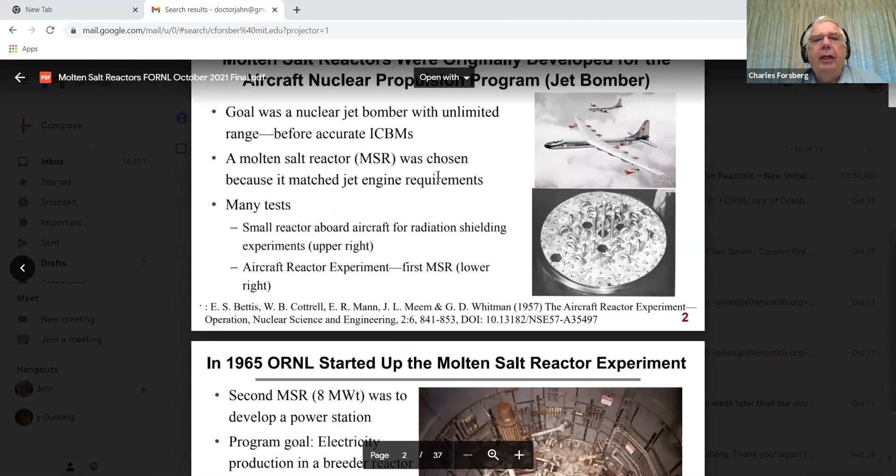Okay, we can go to the next slide for some history of the molten salt reactor. These reactors were originally developed for the aircraft nuclear propulsion program, that is, the jet bomber. The goal was a nuclear jet bomber with unlimited range. That was before the development of accurate intercontinental ballistic missiles and before people had satellites to find out where cities were located in the Soviet Union. It's a little hard to bomb a target if you can be off by 50 miles and if you don't know where it is.

An important point to observe, which I'll come back to later, is that the molten salt reactor was chosen because it matched jet engine requirements - we'll get back to why that's important in terms of modern power cycles. There were a lot of tests, including some big ones. A small reactor was put aboard an aircraft for radiation shielding studies. And in Oak Ridge, the aircraft reactor experiment was the first molten salt reactor that was actually built - there's a picture of the top plate on the right.

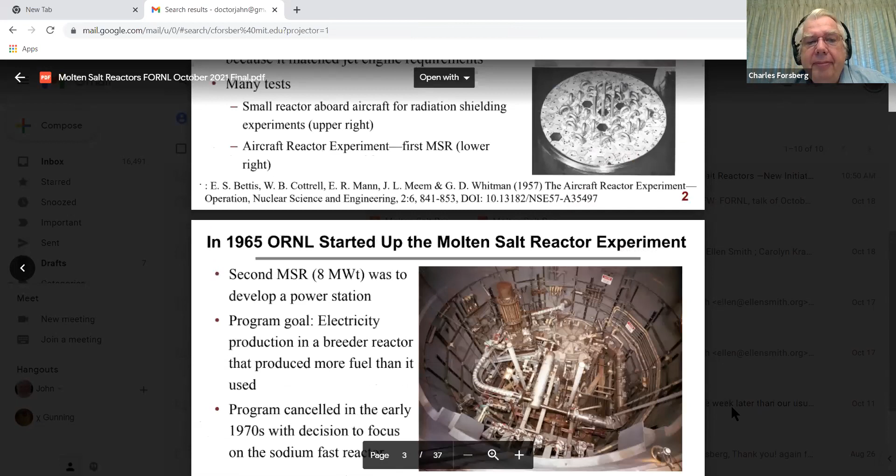Now, some of you probably are much more knowledgeable on this than I am.

In 1965, ORNL started up the molten salt reactor experiment. It was the second molten salt reactor, 8 megawatts. The goal was ultimately to develop a power station. Programmatically, it was electricity production in a breeder reactor that produced more fuel than it used. The program was canceled in the early 70s with a decision to focus on sodium fast reactors.

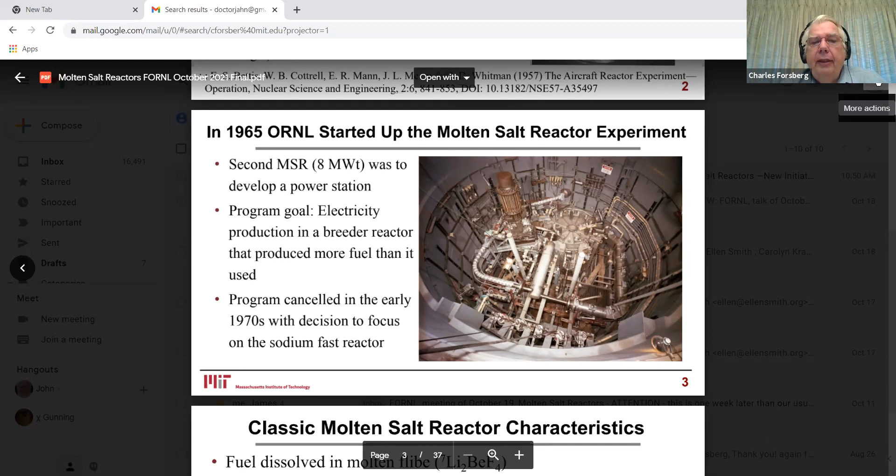A brief description of what I'd call the classic molten salt reactor. The fuel is dissolved in a molten fluoride salt, versus all other reactors that are solid fuel. The breeder reactor converts fertile thorium into uranium-233 and fissions that uranium. That involved online processing of the molten salt. You obviously would have an energy source for millions of years.

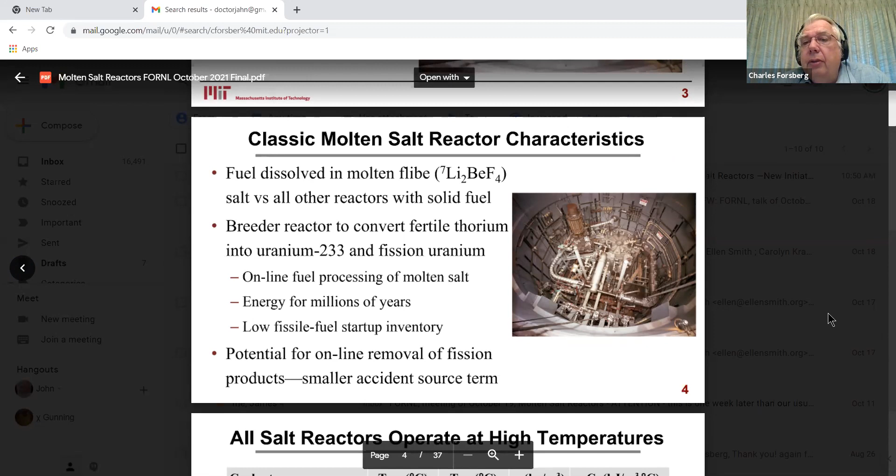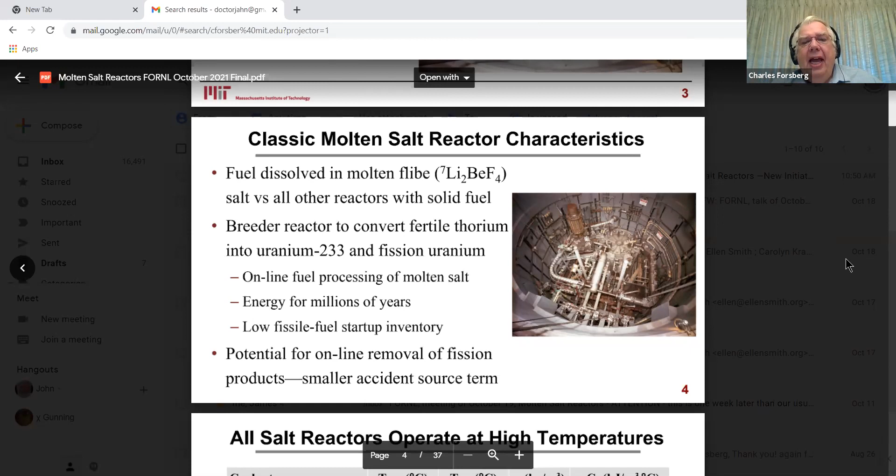One thing that's not appreciated now, but was very much appreciated at the time, is that these thermal spectrum molten salt reactors have very low fissile-fuel startup inventories compared to other reactors. At that time, one of the real concerns was how much fissile material was on the planet Earth. It turns out the geologists were off by a factor of 100, maybe 1,000 - they were seriously in error.

Whoops, we just lost the picture. Sorry, I was trying to get Jim Rome to mute, but I screwed up when I did that. Hey Jim, mute yourself, Jim.

Last, which is often not appreciated, is that in a molten salt reactor you have the option of removing the fission products, which limits the accident source terms. That keeps coming back in terms of safety. I'm not going to go into it, but it's an important future option.

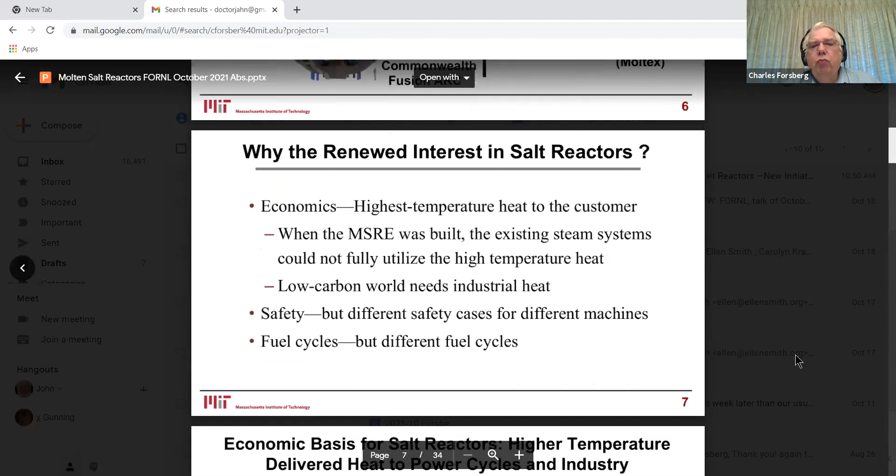Why the renewed interest in salt reactors? The first one is economics - high temperature heat to the customer. One of the interesting things about the molten salt reactor experiment is that when it was built, it did not couple well to existing steam plants, because it ran at such a high temperature compared to the steam plants of the day. That's no longer a challenge - steam plant temperatures have gone up. Second, in a low carbon world, you need industrial heat, and this high temperature characteristic is what the customer buys the reactor for.

Second, there are safety advantages, but that depends on the particular machine and their fuel cycles - and we now have a lot of different fuel cycles.

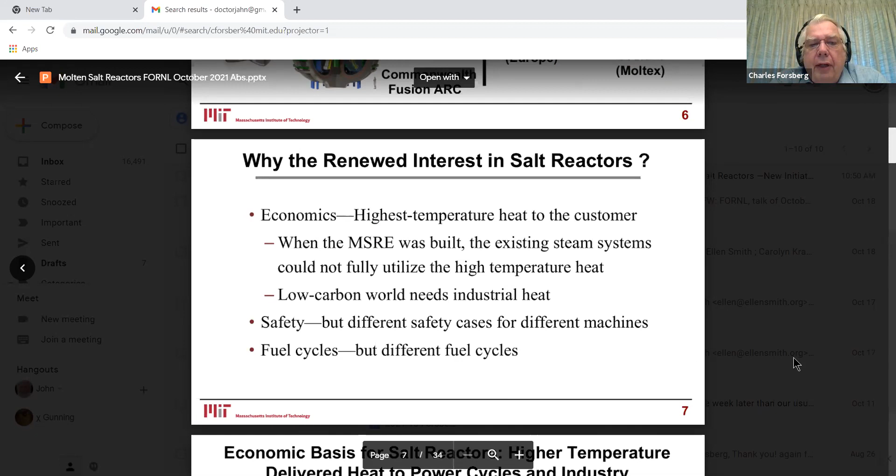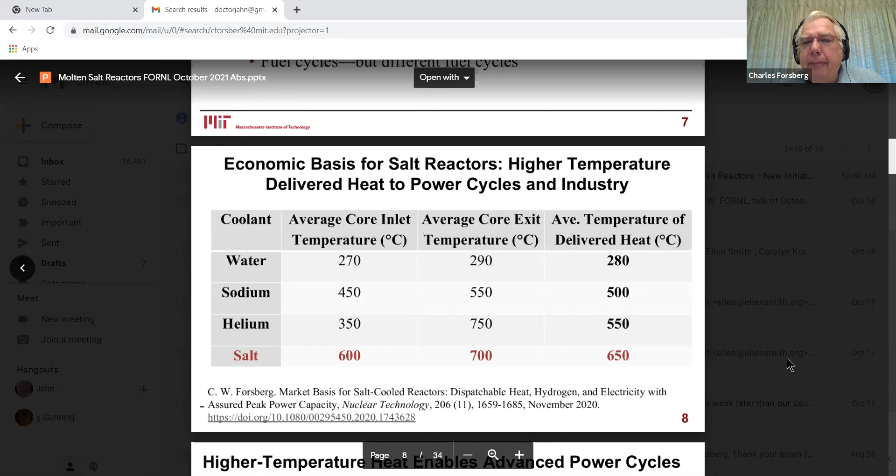Now, high temperature heat enables advanced power cycles. This slide could be an hour talk by itself, so I'm not going to say very much about this, except starting with the observation that molten salt reactors are designed to couple to a jet engine. And the most popular power plant today is the combined cycle gas turbine, a consequence of 70 years of advances in gas turbine technology. And because salt reactors were designed for these things, they actually couple pretty well with them. There's a lot of work on something called a nuclear air Brayton cycle with heat storage.

You operate the reactor at base load, but it is variable output to the grid. And what I mean by variable output is you have the reactor providing heat, in the light blue, to the multiple turbines. But after turbine 2, you can operate in base load, or you can take the temperature from let's say 650, 700 C, and inject natural gas or hydrogen to boost the temperature for the last turbine in the gas turbine cycle up to about 1400 Celsius if you want, blazingly warm.

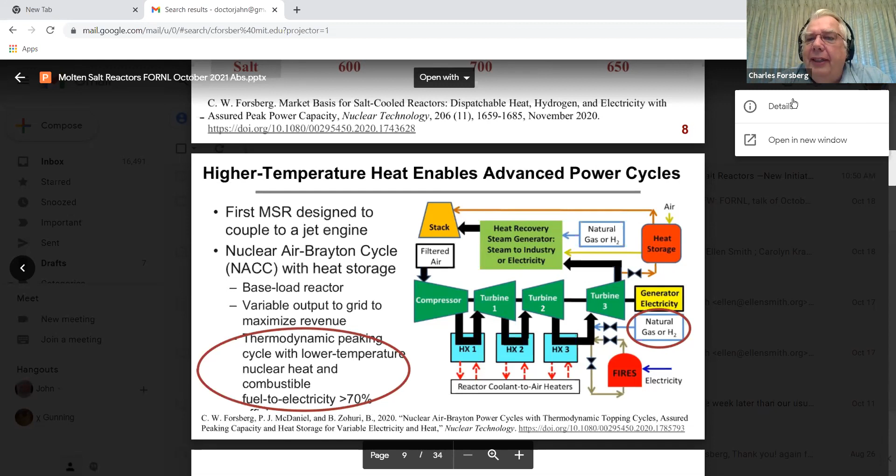And when you do that, that booster stage, that peak power capability results in a system where the incremental gas or hydrogen heat to electricity efficiency is over 70%. It's a thermodynamic topping cycle. So there are lots of things you can do if you can couple your reactor efficiently to a gas turbine, which fortunately was the design criteria for molten salt reactors. And there's an open source article if you want to go into the gory details of what that involves.

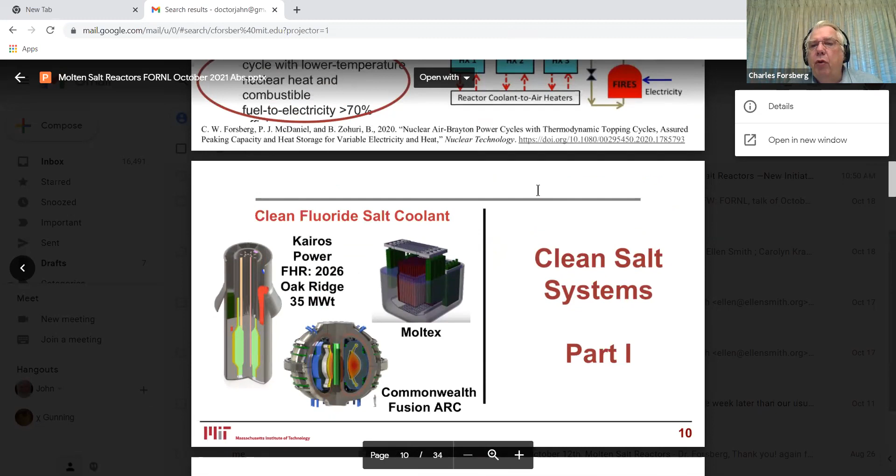Could we have the next slide? Now, the next set of few graphs are going to cover clean salt systems. So these are clean salts. There's no fissile material in the salt. I'm going to discuss two: what Kairos is up to, and Commonwealth Fusion's ARC system. Next slide.

Fluoride-salt-cooled, high-temperature reactor, clean salt, solid fuel. This is being developed by Kairos Power. It's a 35 megawatt test reactor, the first one they plan to build, which should be operational by 2026 in Oak Ridge. Kairos has about 200 full-time people plus an awful lot of part-time people and consultants and contractors, so it's a substantial effort to get that reactor built on time.

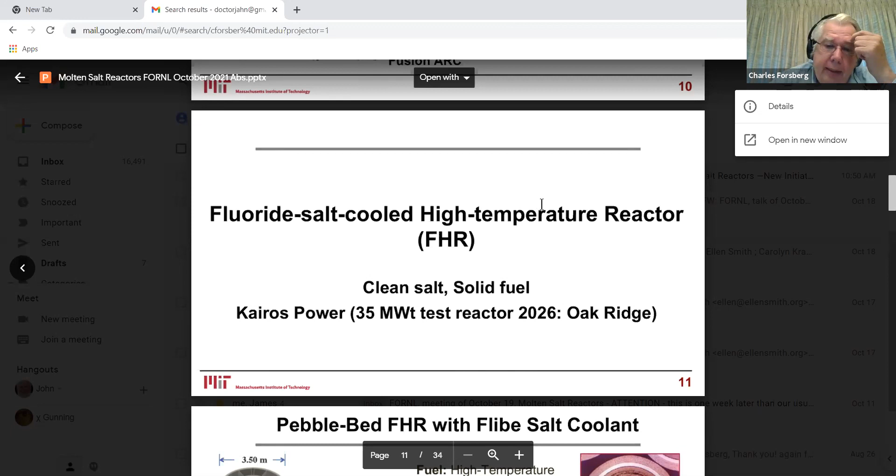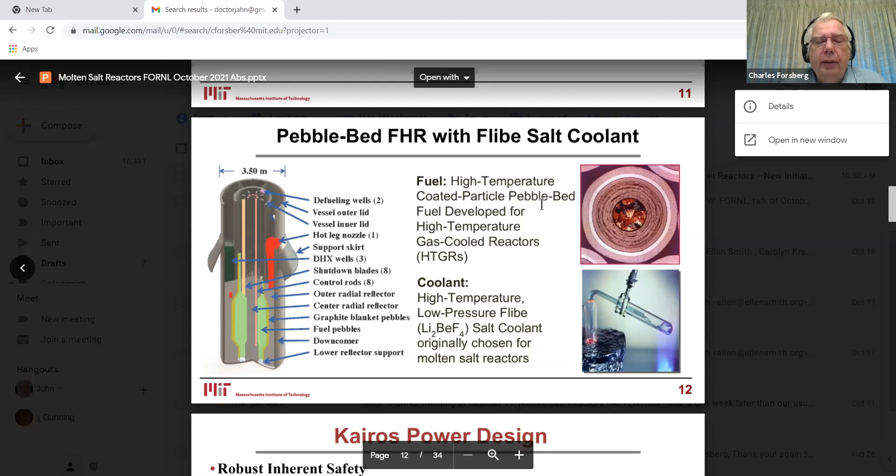Next slide. The FHR is a pebble bed FHR with fluoride salt cooling. You have the high temperature fuel and the liquid salt coolant. Can I have the next slide?

Okay, there's a newer version of this slide deck that I sent you, but I'll just mention what's in the newer version in passing. The fluoride salt cooled reactor came out of Oak Ridge National Laboratory, and that shouldn't be too terribly surprising because it combines liquid salt with HTGR fuel, and Oak Ridge had major programs in both areas. So there were lots of people that became very familiar with that particular reactor concept.

Now, it turns out in about 2002, there was a Gen 4 meeting, and myself and Per Peterson of Berkeley and Paul Pickard of Sandia were on the miscellaneous reactors subcommittee. And we went out to lunch and were not very impressed by the odds and ends that people had proposed. Out of that lunch came the FHR, which combined high temperature reactor fuel with molten salt. And that had a lot of advantages.

The HTGR fuel goes to very high temperatures. When you go from a gaseous coolant to a liquid coolant, your cooling capability goes up dramatically. It's a tremendous difference. And so you can get the power density up by a factor of 10. You also have a whole bunch of safety advantages.

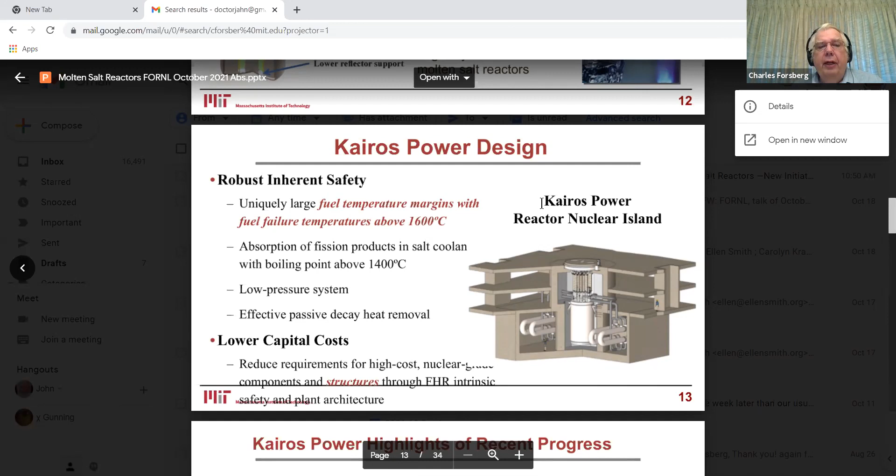They have a second facility coming online in Albuquerque, the engineering test unit and training facility. This is where the big equipment goes. As I'll describe later, on the Hermes reactor, they will build a non-radioactive version of the Hermes reactor in Albuquerque and run it, shake it down, and that will be used for the design of the Hermes reactor. They have an engineering test unit which will be the same size as Hermes, and they've filed a preliminary safety report in September. And of course, the Hermes reactor will get built in Oak Ridge and is supposed to be operational by 2026.

Could I have the next slide? The Kairos power design — this shows the engineering test unit, and the sequence of activities. They're doing a lot of laboratory tests in Alameda. Then they move to Albuquerque, where they have the engineering test unit, which is full scale, the same scale as the Hermes test reactor, where they have the flibe salt at temperature and shake out everything from control rods to pumps to instrumentation.

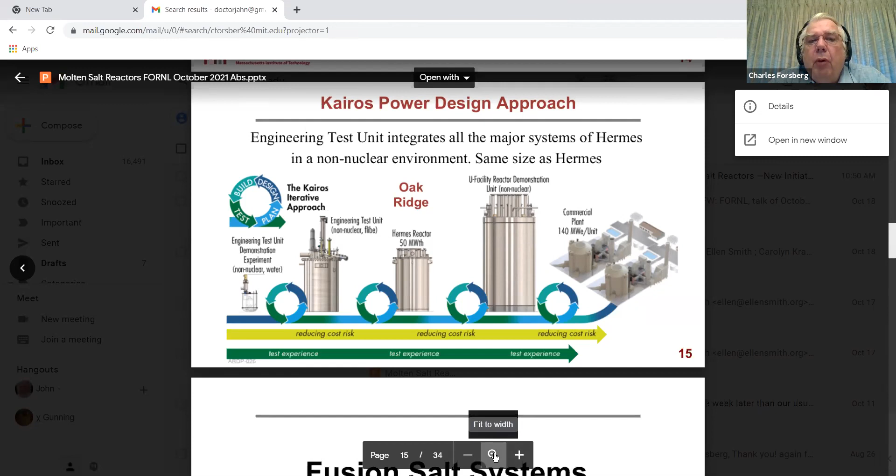Then they move to Oak Ridge, where Hermes will be built. It'll be about 35 megawatts, and that's about a 20-foot high vessel, to give you some perspective. After that, they'll go back and build the full-scale non-radioactive variant of the FHR in Albuquerque, and that leads to the commercial plant with a power output of 140 megawatts per unit. One thing you'll note about this, as a salt-cooled reactor with solid fuel, is the vessels are actually pretty small.

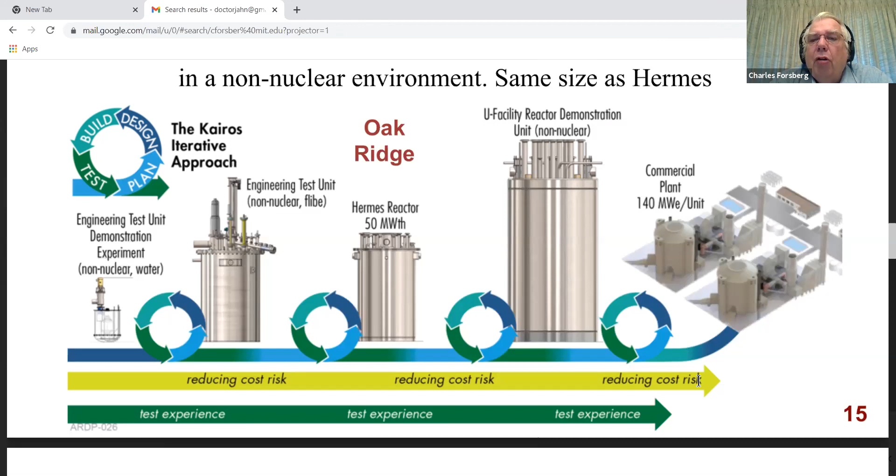That's partially because liquid salts are a great heat transfer fluid. And if you have an HTGR fuel, you can run a lot of delta temperature drop across the fuel to heat the salt. So a lot of things come together for a fairly small reactor. Could I have the next slide?

Well, I'm now going to shift gears to the fusion salt systems. And if I could have the next slide, describe what's going on. There's been a breakthrough in magnetic fusion with REBCO superconducting magnets.

Turns out that the size of a fusion system varies with one over the fourth power of the magnetic field, not fuels. And there was a manufacturing breakthrough of REBCO supermagnets about a decade ago that enabled doubling the magnetic field. People had wonderful superconductors — there was only one small problem: they could fabricate them at the milligram scale, and that doesn't work very well if the quantities of superconductor you need are measured in tons. But about a decade ago, somebody in the manufacturing space finally figured out how to do that.

Why is that important? It reduces the fusion machine size by a factor of 16. And what that implies is that the power density in the fusion blanket increases by an order of magnitude, making it very difficult to cool solid blankets — a big problem there. The other thing is these very high magnetic fields create very large incentives to have a low electrical conductivity, to avoid coolant-magnet interactions, and the solution is a liquid flibe blanket. Now, these blankets have been looked at before, but they haven't been high on the priority list. But with these much higher powered fusion machines, suddenly salt blankets look like they become the preferred option.

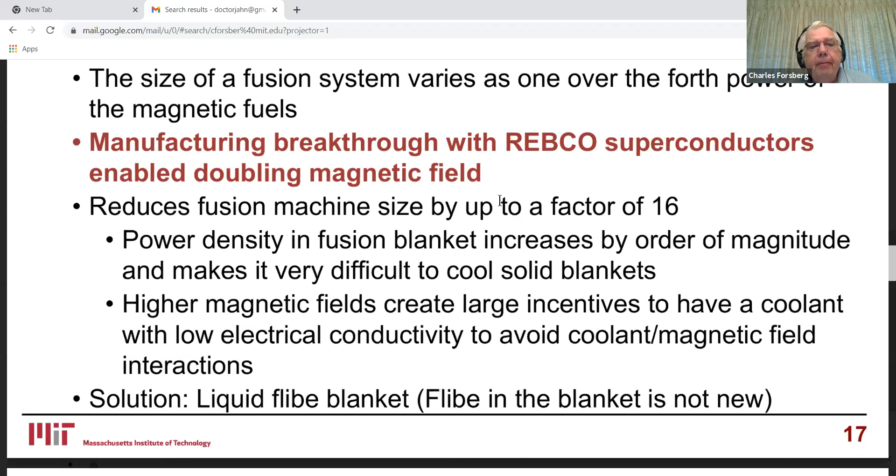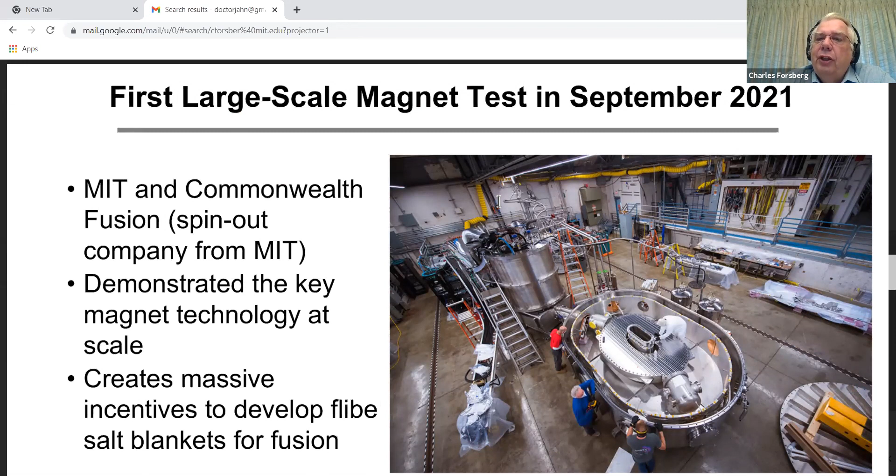MIT did the initial analysis and initial studies of this kind of system. MIT and Commonwealth Fusion, a spin-out company from MIT, built the first large-scale magnet test. Because to make this machine work, the whole question is, can you build a 20 Tesla, really big, high-powered magnet? That was tested last month. So I think you can safely say all future fusion machines are going to use that magnet technology. And with it comes very high power densities in the blanket, and big incentives to develop flibe salt blankets for fusion. So the fusion game is driving in the same direction of developing flibe salt.

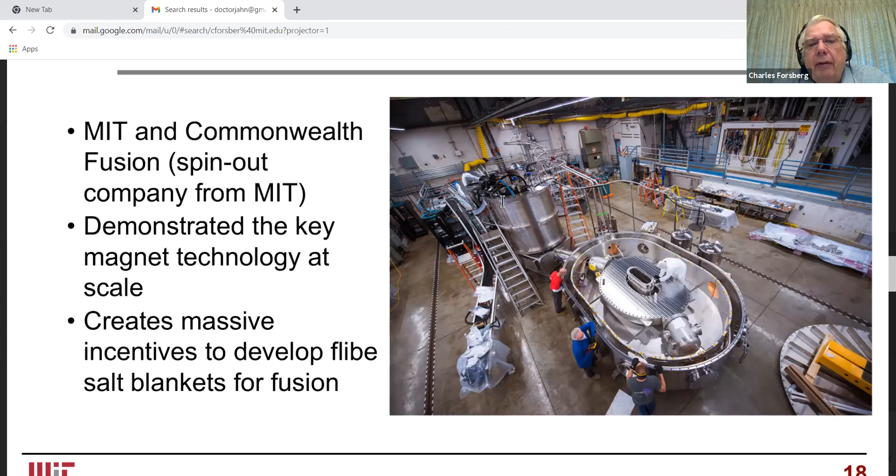That's the fuel. Now, one important observation: in a fusion machine, you use lithium-6 to maximize tritium production, which means the tritium production rate in this machine is about 1,000 times higher than it is in the Kairos FHR. So these guys have a serious tritium challenge in containing the tritium. That was an issue for the molten salt reactor, but for these guys, when it's 1,000 times larger, there's going to be a lot of work on tritium control systems.

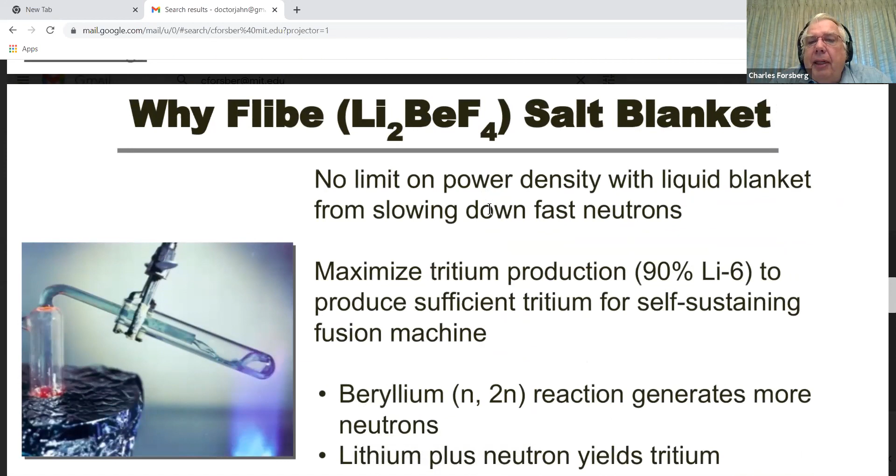Why flibe salt? No power limit on the power density. Second, you can maximize tritium production with lithium-6. A whole bunch of nuclear reactions generate tritium. There's a beryllium (n, 2n) reaction that works quite nicely with these high energy neutrons, and there's lithium plus a neutron that yields tritium. Last, which most people don't appreciate, is that of all the salts, FLiBe actually has the best heat transfer properties. There are a lot of other fluoride salts, but it turns out that if you do the heat transfer experiments, FLiBe is the salt you want to use if you've got a serious heat transfer problem.

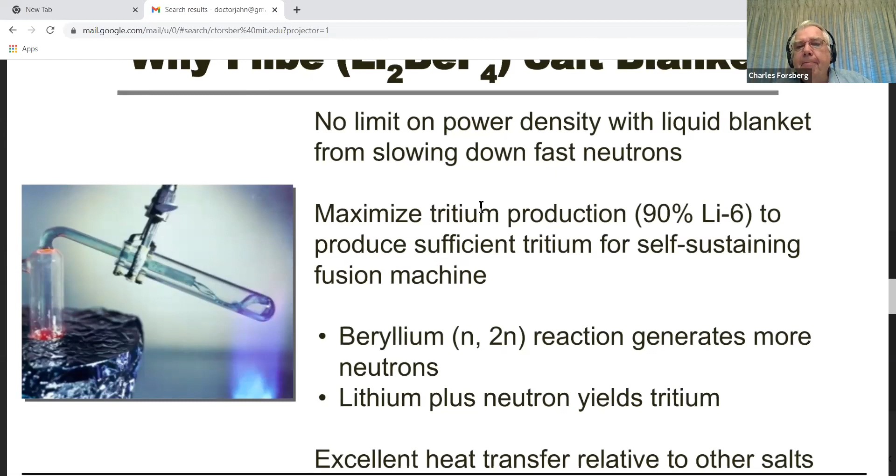With that, let's turn to the next subject. Now I'm going to discuss uranium plutonium fuel dissolved in salts, and I'm going to use two examples.

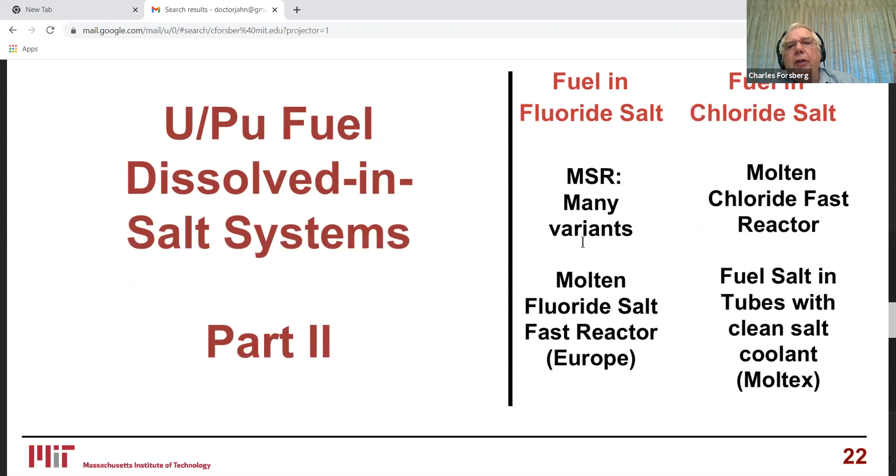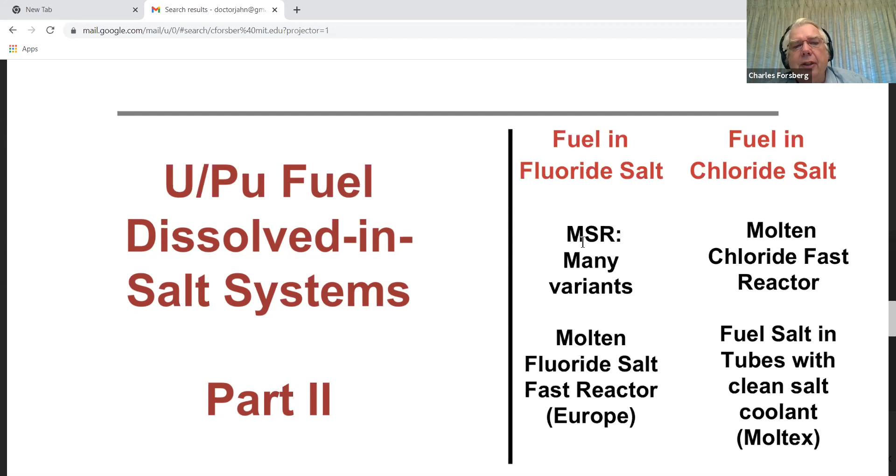I should mention, by the way, in terms of funding, my guess is that the previous two fission and fusion examples probably have the most funding. Nobody's publishing how much money they're spending, but if you look at the number of people and the size of the laboratories currently, I think the FHR and the arc fusion system have the highest burn rate in terms of money, because I know the Alameda site has 200 people full time on it, plus Albuquerque and a few others, so they're burning money at a good clip. These other two examples are also burning money, not quite at the same rate, I don't think, though. But the next one, on the next slide, they're working hard to catch up, and they will catch up.

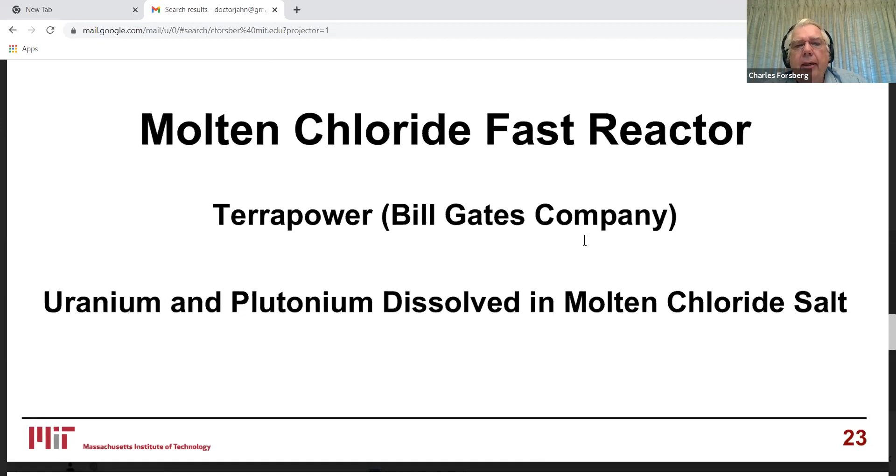That is the molten chloride fast reactor, being developed by TerraPower, a Bill Gates company. It's uranium, plutonium dissolved in molten chloride salts. Chloride salts have been around a long time, but as I will discuss, this particular concept is less than a decade old. Two classes of molten chloride fast reactors are being developed.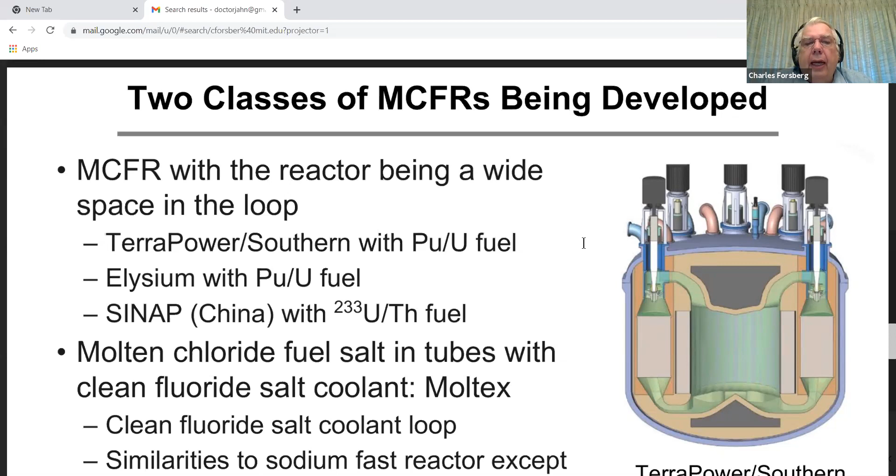The first one is the molten chloride fast reactor, with the reactor being a wide space in the loop. The big player is TerraPower with Southern, a utility, using a plutonium uranium fuel cycle. The other company is Elysium, also with a plutonium uranium fuel cycle. The Chinese at Sinap are also looking at this, with a uranium-233 thorium fuel cycle.

The second version is a molten chloride fuel salt in tubes with clean fluoride salt coolant, being developed by Moltex in Great Britain. They have a clean fluoride salt loop, which makes it easier on the primary loop. It's sort of similar to a sodium fast reactor, except it's really simple to process the fuel because you have liquid chloride salt in the tubes. As you cut off the tubes, you just pour the chloride salt out. So it's really fast, simple reprocessing if you choose to go that route.

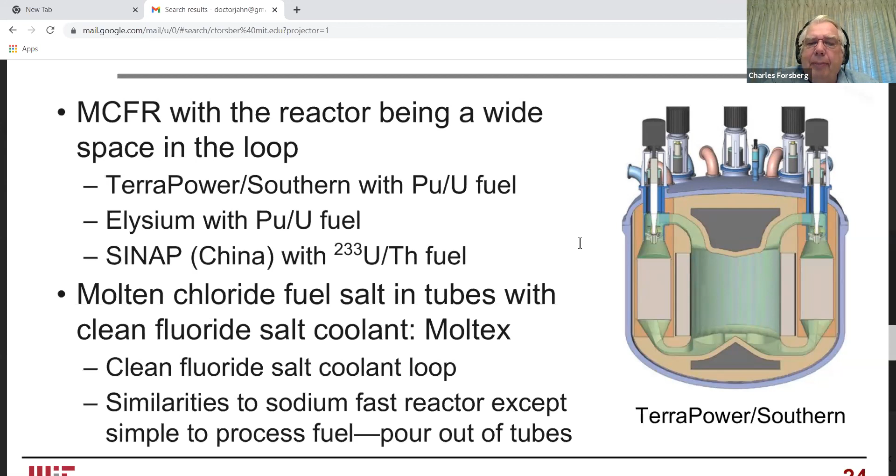Now, TerraPower is a little bit different as a nuclear company. They defined goals, and that led them to choose the reactors they wanted. They wanted the usual things: engineered safety, minimize energy cost, offer new options for nuclear waste, maximize proliferation resistance, which is a very big issue in their priority set, and provide global scale energy.

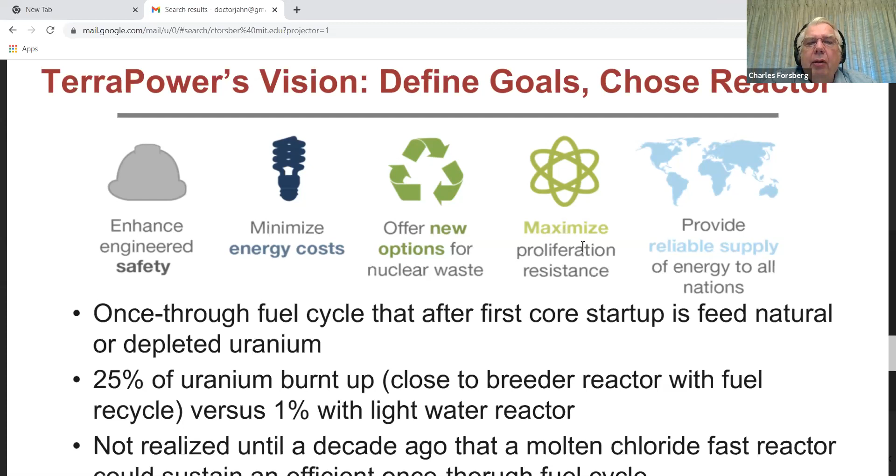What the molten chloride fast reactor they've developed uses is a once-through fuel cycle. After the first startup, it burns either natural or depleted uranium. So you start it up, and after that you put in a little depleted uranium and take some of the fuel out. This particular kind of machine can get 25% of the uranium burnt up. That's very close to what a traditional breeder reactor can do with fuel recycle, versus 1% with a light water reactor.

Now, it was not recognized until a decade ago that such a molten chloride fast reactor with a once-through fuel cycle was actually possible. It turns out there were some question marks on the chlorine cross sections. And of course, who has an interest in chlorine cross sections with a couple of MeV in the fission range? Nobody was looking at it, so nobody had an interest in it. In addition, it turns out to make this machine work, you have to use chlorine-37, the low cross section. Chlorine-35 is a sky-high cross section, which will shut down anything. So it's not too surprising measuring certain cross sections was low on everybody's priority list.

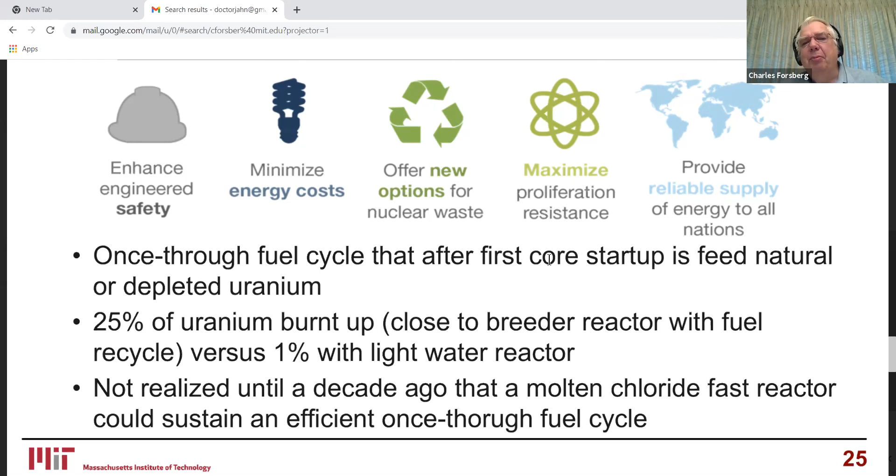Then somebody measured it and they said, whoops, a little bit off on the estimates. And then everybody was off to the races. So it's a new concept based on some new knowledge in the last decade.

Could I have the next slide?

TerraPower's once-through breed and burn. This machine has a really hard neutron spectrum, very high breeding ratio. It converts fertile uranium-238 to fissionable plutonium-239 and fissions the plutonium. Again, you start up the first reactor with enriched uranium chloride, uranium-sodium-potassium chloride mixture. Add natural uranium and throw away some of the fuel salt with fission products and actinides, into a deep borehole or equivalent disposal. As I said, the really interesting thing is you can burn 25% of the uranium fed into the machine, assuming you get the machine to work.

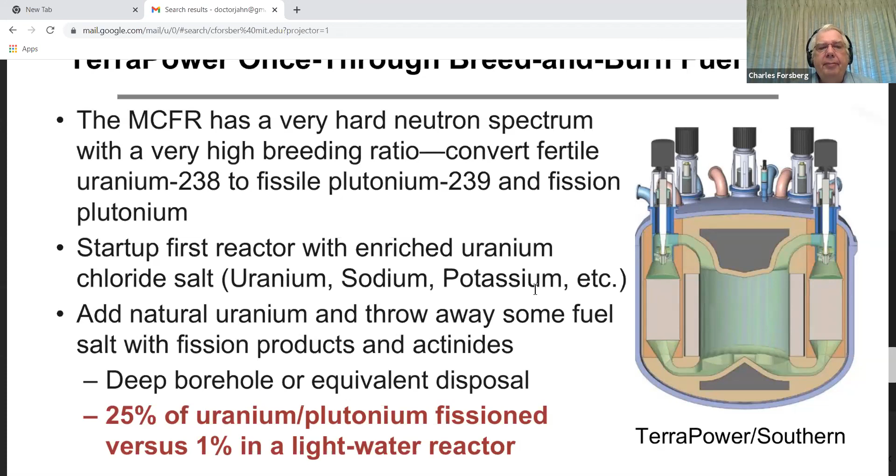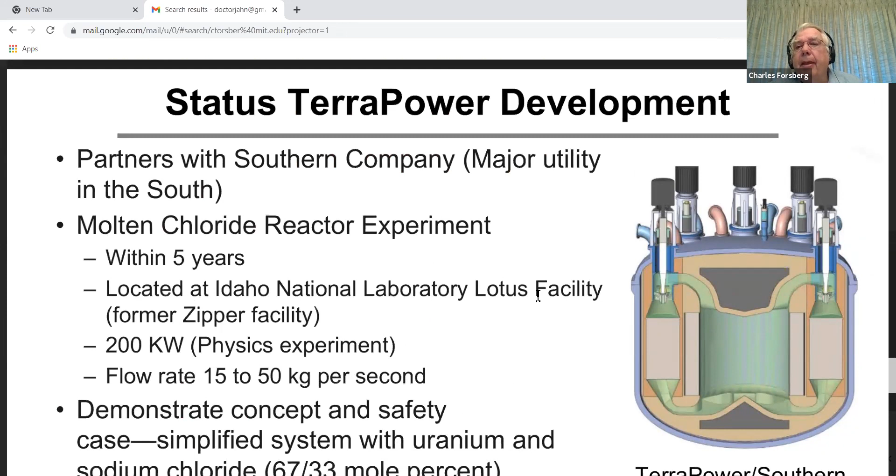Status: they're partners with Southern Company. What they plan to do is a molten chloride reactor experiment, to be built within 5 years, located at Idaho National Laboratory in their Lotus facility, formerly known as the Zipper facility. It's a 200 kilowatt physics experiment to make sure the reactor kinetics are understood in the system. The flow rates are 15 to 50 kilograms a second. And of course, it's primarily to demonstrate the concept and the safety case. It'll be a very simplified system.

They'll use high enriched uranium and sodium chloride, which will be able to answer the reactor physics experiments. The physics analysis all indicates the machine should be stable in terms of reactivity and kinetics and so forth. But this machine is so far away from everybody else's design space that the answer is, you better go out and try this out just to make sure we haven't messed up somewhere in the calculational space.

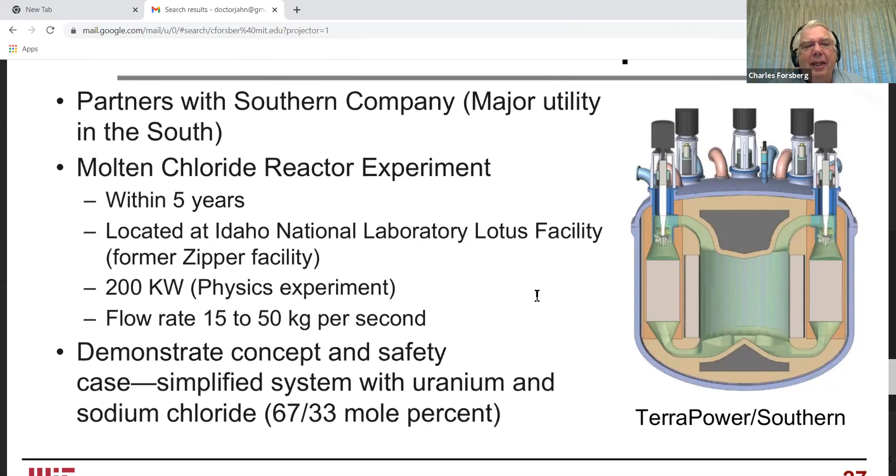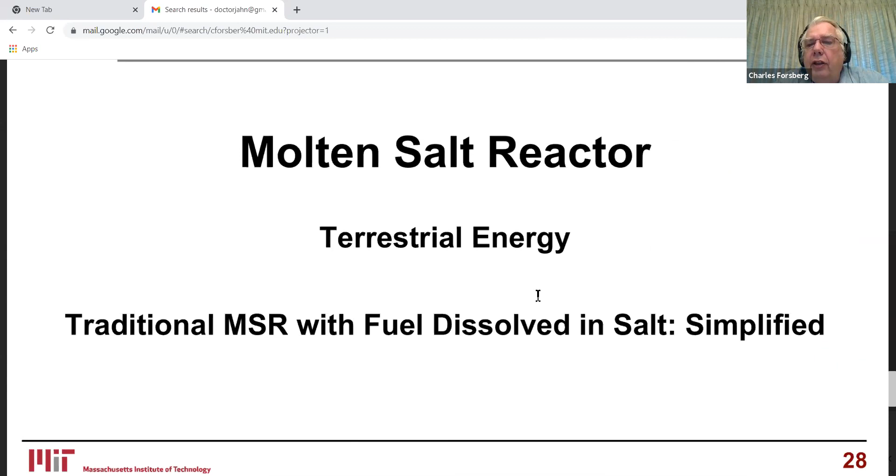The molten salt reactor. I'm going to discuss Terrestrial, this Canadian company, which has a US subsidiary. It's a traditional molten salt reactor with fuel dissolved in salt, a simplified version of that machine.

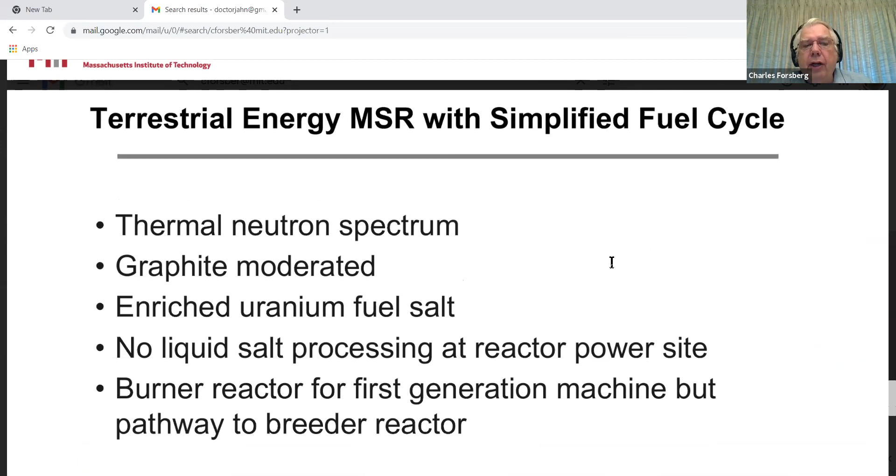Could I have the next slide? Terrestrial Energy: molten salt with simplified fuel cycle, thermal neutron spectrum, graphite moderated, enriched uranium fuel salt, no liquid processing at the reactor site. It'd be a burner reactor for the first generation, but a pathway to a breeder reactor.

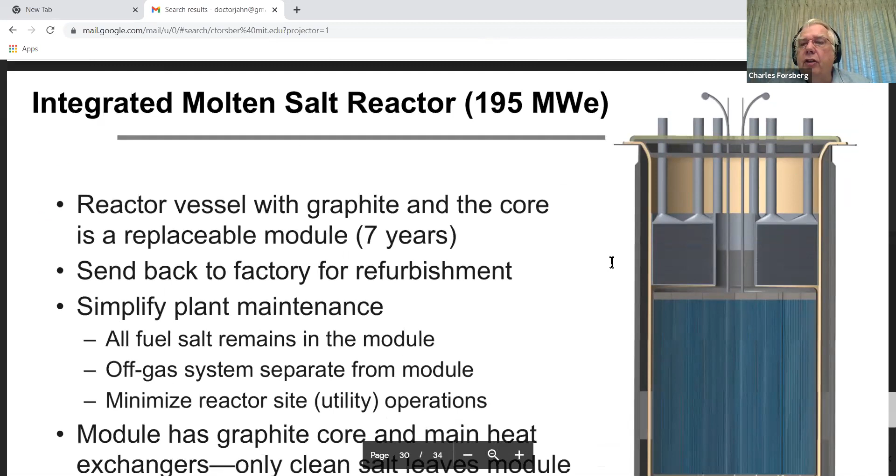You run it for 7 years, and they send you a replacement module. You let the module you took out sit for a while, then send it back to the factory for refurbishment. The goal is to simplify plant maintenance.

All of the fuel salt remains in the module, which contains the fuel salt, the graphite, and the intermediate heat exchangers. The off-gas system is separate from the module, and the goal is to absolutely minimize reactor site operations, letting all the complicated operations, such as replacing the graphite, be done at the factory.

The design feature is that with the graphite core and main heat exchangers, only clean salt leaves the module. So it's a package system where you send it back to the factory when you're done. You can move some of the salt from one modular unit to the next unit at the site, but the idea is to really minimize this from the utility perspective and let the fuel cycle guys deal with everything else.

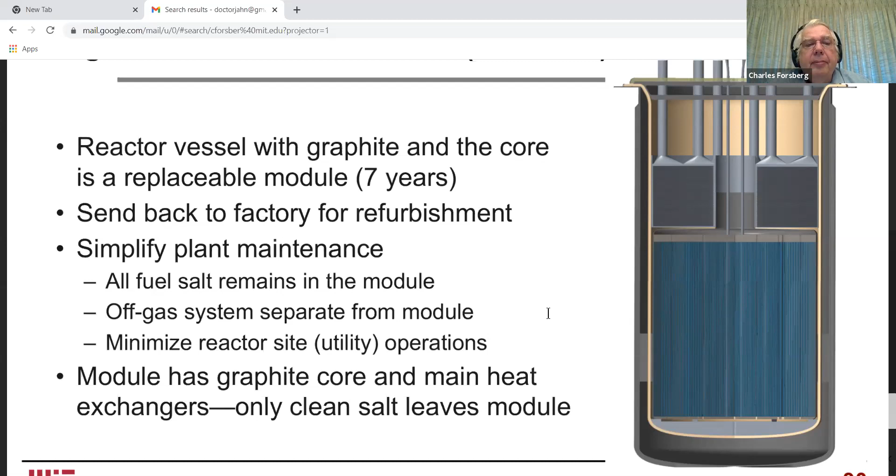Can I have the next slide? This happens to be the flow sheet of their system: three loops, a primary loop with fuel salt, a secondary salt loop, and then a nitrate salt loop, which is the tertiary loop.

The FHR also has a nitrate salt loop, and so does the different salts proposed for the TerraPower one. The thinking here is that with a nitrate salt, you can put in heat storage for variable output with baseload input of heat.

Most of you may not be aware of it, but all of the big concentrated solar plants use nitrate salt as their heat transfer loop, and they store gigawatt hours of salt in hot and cold tanks.

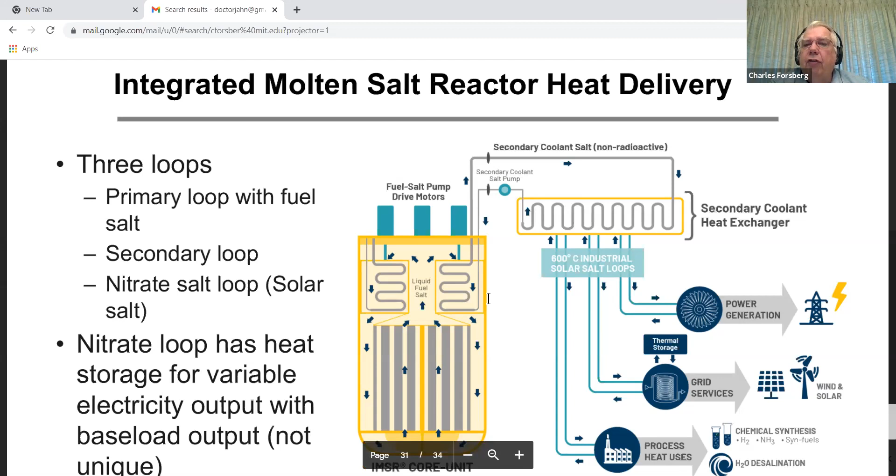If you have a nitrate salt system in the intermediate loop somewhere, you can put in gigawatt storage to handle daily to weekly cycles of heat for variable energy demand while the reactor operates at base load—essentially replacing the role of the gas turbine in the power system.

Could I have, I think, the last slide? Well, serious money is going into salt systems: Kairos, TerraPower, Commonwealth Fusion.

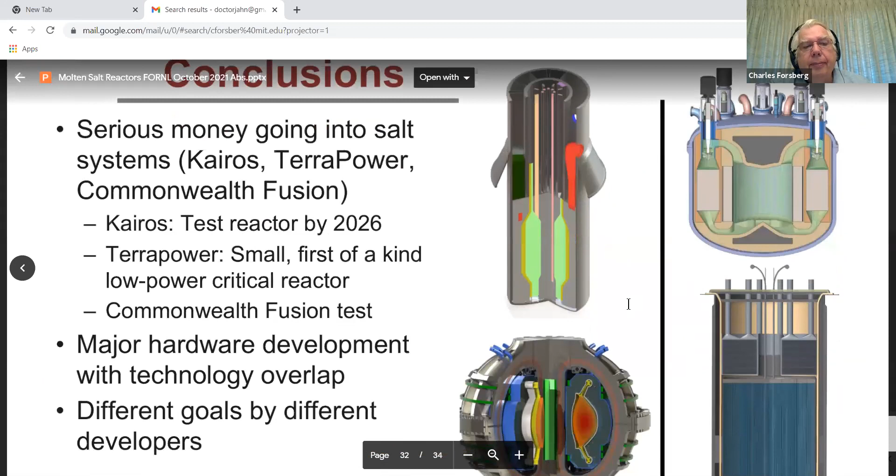The first reactor that's supposed to go online will be the test reactor at Kairos in Oak Ridge. TerraPower is probably going to be a little bit later at the critical facility, although it could be pretty close, because it's a much smaller experiment. But they've only begun to work on that and don't have the manpower up.

Toward the end of the decade, Commonwealth Fusion proposes to have their break-even experiment up and running. All of these efforts are burning fairly serious amounts of money, and they measure their manpower in hundreds of people. So you're way beyond laboratory scale operation.

You're doing a lot of stuff at the pilot plant scale—a lot of hardware development, technology overlap, and very different goals by different developers. Each of these developers has a different set of goals and a different set of timelines.

So with that, I'll stop and open the floor to any questions.